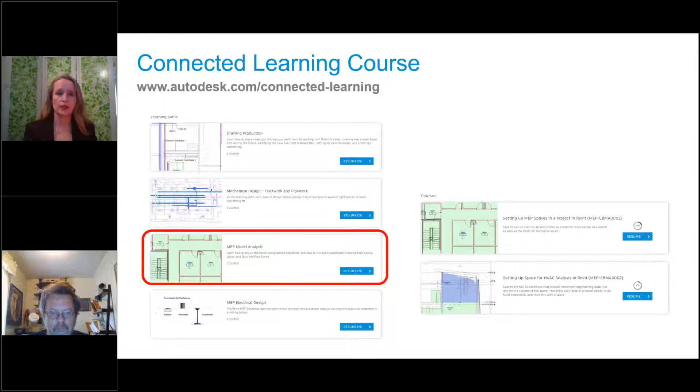Okay, well, I know we ask a lot of people to do some of the learning online beforehand, but if you couldn't, I'm going to go through some of the same things we did in the videos on the Learning Center about adding spaces, how to use a space naming tool. We're also going to look at how you can use a schedule, and then how to look at your spaces in elevation and sections, how to fix different volume issues, how to add space separators, and understanding exactly what room bounding elements are. And lastly, we'll create some plenum levels and add spaces between the floors to complete the analysis.

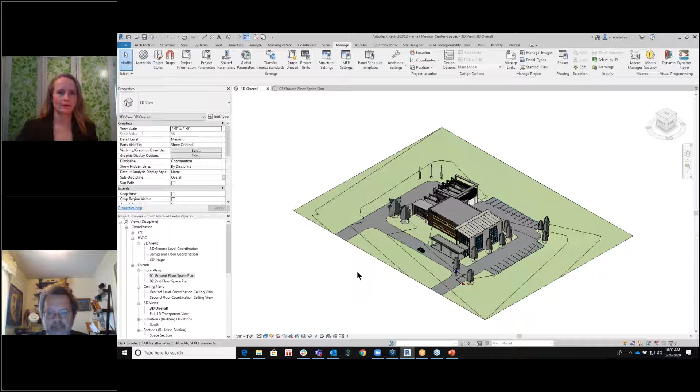All right, so I'm going to go here, and I've started up. This is part of the data sets that we have online, so you'll see some of the same things here. This is a small medical office building that we have. It has a linked architectural and a linked structural model inside of it.

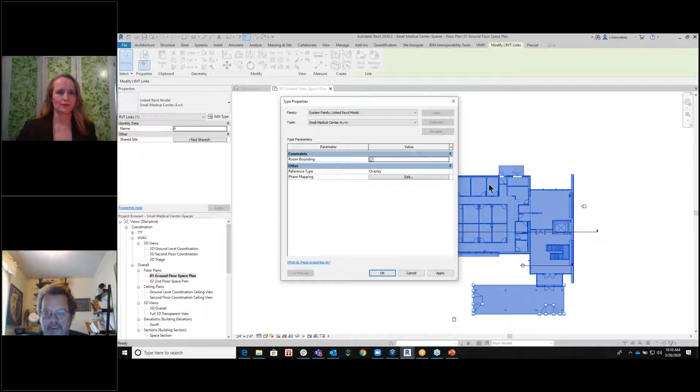So what I'm going to do is go here, and this is just a special view we've set up to show spaces. One of the first things you need to do before you can really get started is find the architectural link model, which I've just selected here. And we need to go to Edit Type. The thing that's really important to make all this work is we need to make it room bounding. What that means is we can use the walls in the architectural model to help define our spaces that we're going to be placing throughout the model to help us with analysis.

So after I've done that, the next thing I need to do is go to Visibility Graphics, which is VV or VG.

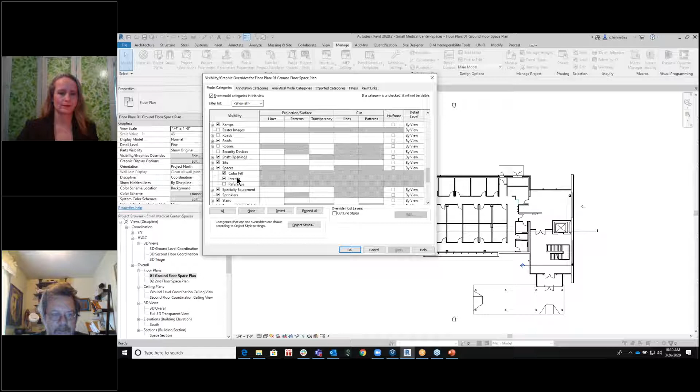What I want to do is scroll down here until I find spaces, expand it out, and make sure the interior part is filled out so that we can actually see them when we place them. I'll click OK, scroll in here a bit, and go up to the Analyze tab.

Now, we have these things called spaces. What they do is help define the area and volume of a room that they're inside of. I'll click on here, go inside a room, and you see it automatically finds the walls and the boundary of the room. I can just left click to place it here.

Now you notice I can select it here, and this shows all the properties. You'll see it has information for lighting, electrical loads, gives us the area and volume, and also talks about mechanical airflow. So a lot of information that the MEP engineers can use inside of these spaces.

I can place them one by one, or I can go up here and do Space, and say place them automatically. So I'll left click here, and now it's telling us it's automatically created 53 spaces. You'll also notice when I click on space here, I can tag all these as I place them.

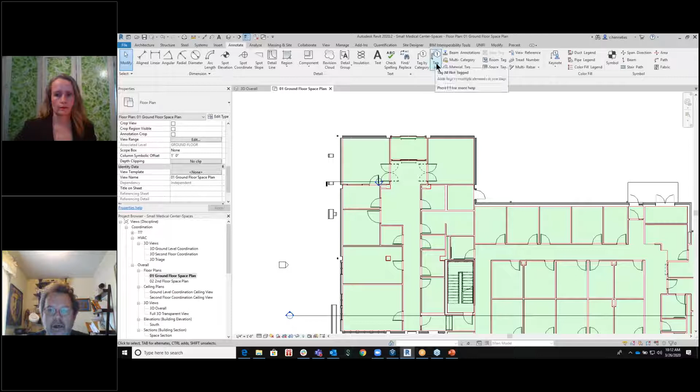If I forget to do that, I can come back here on my Annotate tab, say tag all, pick my space tags, and click them. Now it's gone in and numbered and named all my spaces based on the way they were put in. So now I've got all my spaces here created on the first floor.

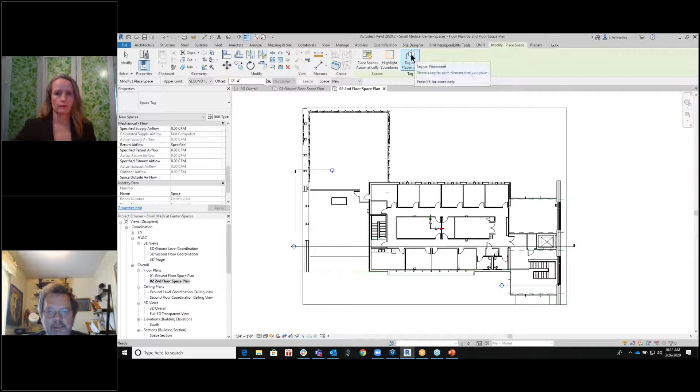I can also go to the second floor and repeat the same operation. I can go to Analyze, Space, and this time I want to say Tag on Placement, and place them all automatically. Now it automatically created 32 spaces.

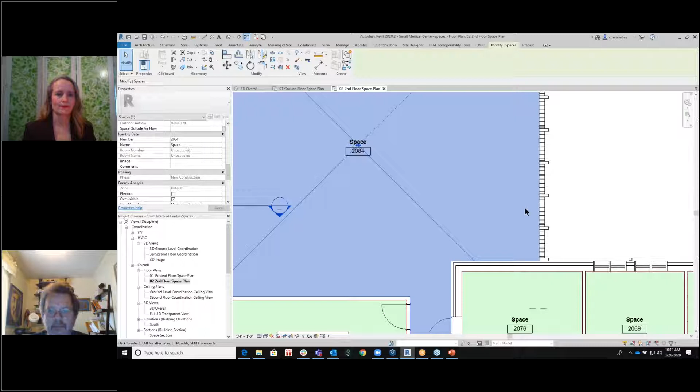Now, as we zoom into these, you'll see this is space 2084. If I click on this and scroll down here, you'll notice it says room number and room name is unoccupied. If we select this one over here, you'll see there's the room number and room name, but it doesn't match up with our space name and number.

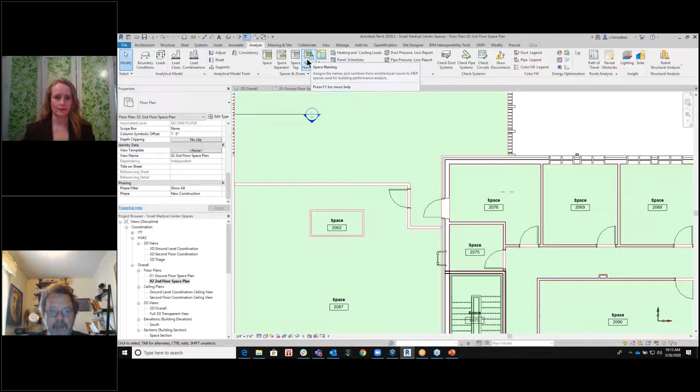So this can get a little confusing if you're trying to do a one-to-one comparison between the architectural spaces and the mechanical spaces. So we can go up here and use, on the Analyze tab, our space naming utility. This gives us the option to match up the names and numbers with the rooms.

We can do names only or numbers only. I'm going to leave it at names and numbers, and do all levels at one time, and just say OK. Now you're going to see some of these have duplicate number values. That's OK for right now.

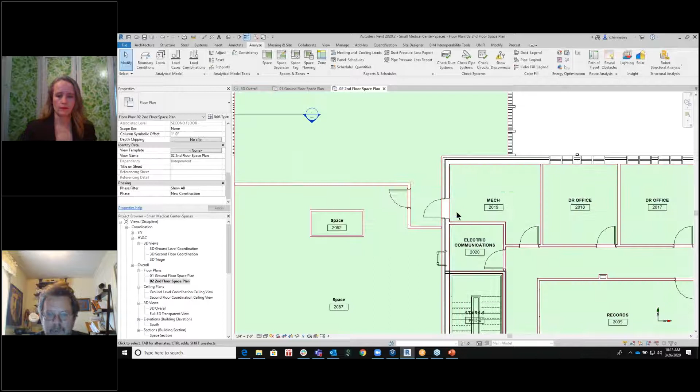I'm going to go through here, and now you'll see it's renumbered these and also renamed all the spaces so they match the architectural names. I'll go back here to the ground floor, and you can see the same thing. So now I've got them all placed, with the names and numbers matching up.

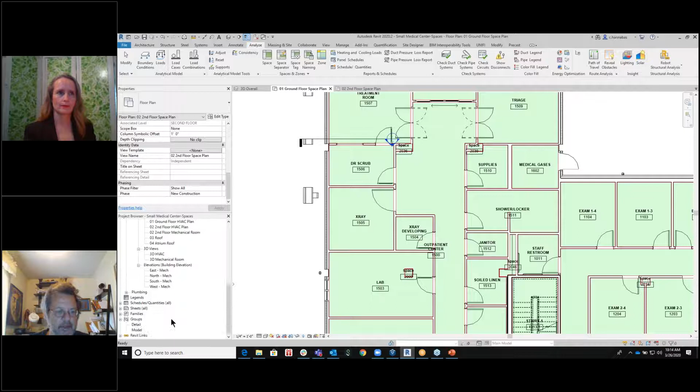I want to come down here now, and let's do a little bit more analysis. I'm going to come down here to my schedules. Let's go down here, and I'm going to open up. I have a space schedule.

Now we can see a listing of all the spaces, names, numbers, room numbers. We see their area, condition type, construction type, and where they're at. Now, this is kind of confusing - it's not very organized well. I'm just going to go here and edit the sorting and grouping.

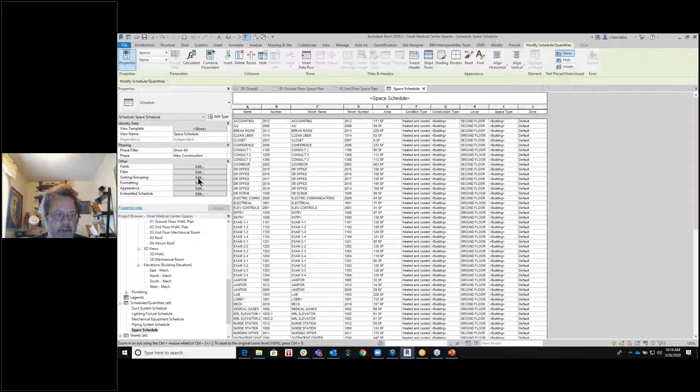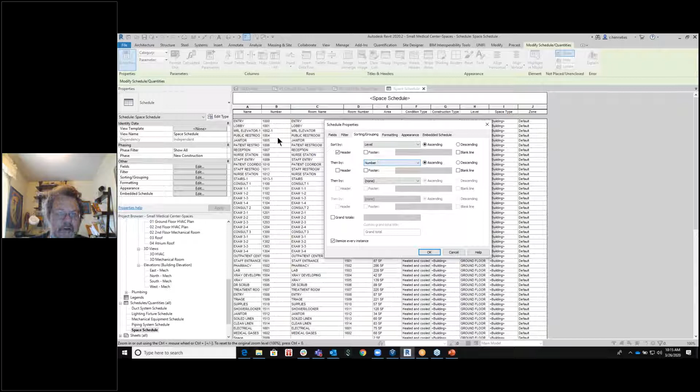So what I'm going to do is first organize them by level, and then perhaps do them by number. So I could go here and do them by number, and say OK. Now, I forgot to do one thing just to make it a little easier - I want to put a header in here so I could see where the separation is. You'll still notice I've got them now all labeled by their number, and I'm going to say OK.

Now I can see they're a little bit more organized, and I can see their actual names.

I can see the room names and room numbers here. Now as I scroll down, I'll notice this space here is very small. Okay, let's go see what happens here.

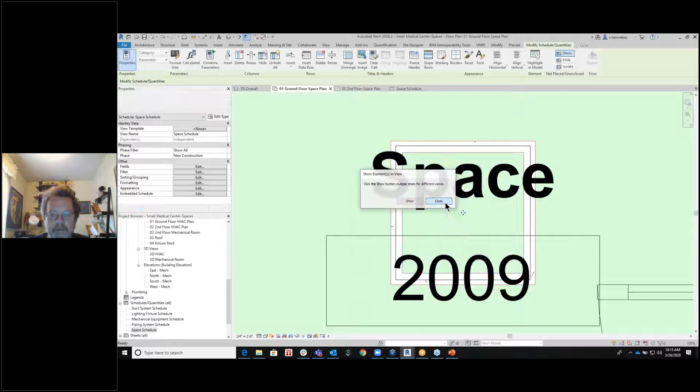If I click on this space and go to highlight in model, it's going to automatically take me to that space. And I'm going to zoom out and I'll see it's just a column, right? So I probably don't want to include that when I'm actually doing any calculations on this.

So let's go back here. Now I can come in and rename that to say I want to just call it column, just like that. And you're going to see it's not going to be heated and cooled, so I can change that to unconditioned, just like that.

So I could do that for each one of these. I'd go here, and now it makes it easier for the next one. I can just type in C, and there's my column. And again, I can change these to unconditioned, just like this.

Now I'm not going to go through and do all those based on the time constraints we have today. I am going to try to show you all the different things, but I'm not going to completely set this building up for us to do calculations. I'm going to show you the steps you would go through in order to do just that.

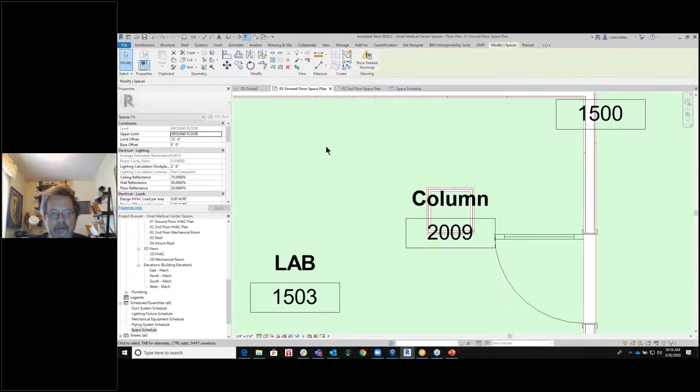The other thing that is somewhat different about spaces - let's go back here before we go on. So now, for instance, maybe I don't want to do a space here in the entry. So I'm going to go here like this, or maybe I don't want to do a space in one of these closets or one of these chases, something like that. So if there's some area I don't want to include, like right here, here's my column again.

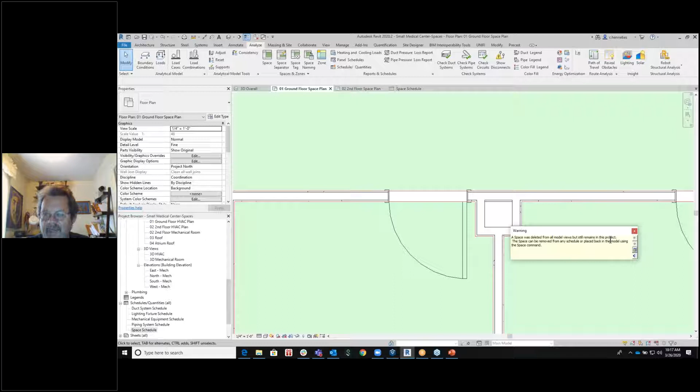And if I go and hit the delete button, it deletes it - you'll see it did delete it from the model view, but it's still in my project. Well, that can get somewhat confusing. So what I'm going to do is come up here and undo it to bring it back in.

Now I'm going to go back to my schedule. What I can do, if I don't want to include these, I can go here, grab these just like this - so there's those right there. And what I'm going to do is delete the rows. Now this will take all those spaces out of my model.

Excuse me. One nice thing about living in Texas is we may have the coronavirus, but we also have tons of allergies. So you may have to bear with me at times.

All right, now we see this is 19 square feet. Well, I'm going to go look and see exactly what that is, and I'm going to highlight it in the model. And there it is right there. I see it's a chase.

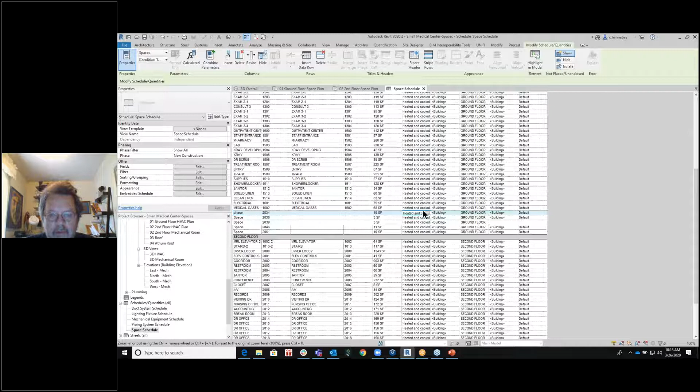Okay, so I'm not going to be heating and cooling that. I'll probably want to annotate or label it a little bit differently so I don't have to worry about getting confused with that later. So instead of calling it something else, I'm just going to call that a chase, just like that, and I'll label it as unconditioned.

All right, so this is what we would go through. We would go through each floor, look at them, and may have to analyze some of these smaller ones that are just chases. We can go through and look at them all and start fine-tuning what our spaces really represent.

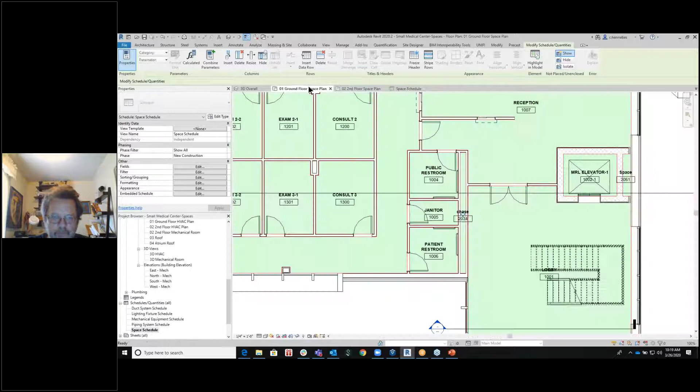All right, so I've kind of walked you through what you would do in order to set up each one of those. Now let's go back here to the ground floor. I want to look at this a little bit differently this time. So I'm going to go here and double click on the section head.

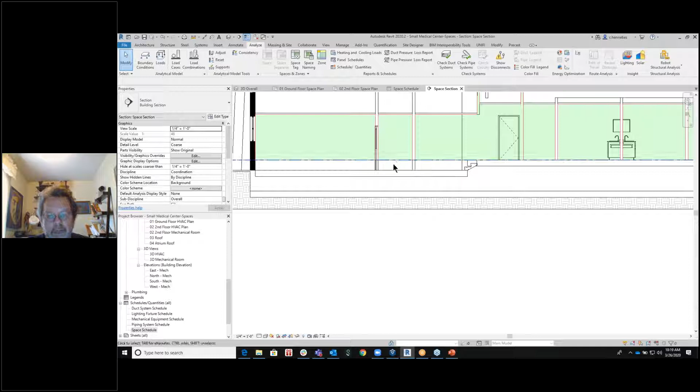All right, now I'm going to look in here and you'll notice these rooms don't go all the way down to the floor - they stop at the level there. Well, in order to include the whole volume and get the correct information, I need to select them and adjust them.

So I can do it several different ways. One, I just select the X here and it gives me a grip and I can drag it down. Watch, I'm going to drag it past there. Oh, it didn't get quite all the way. There we go, I'm going to drag it. And now you'll see I can get it. But that's not really accurate, trying to figure out exactly what that is.

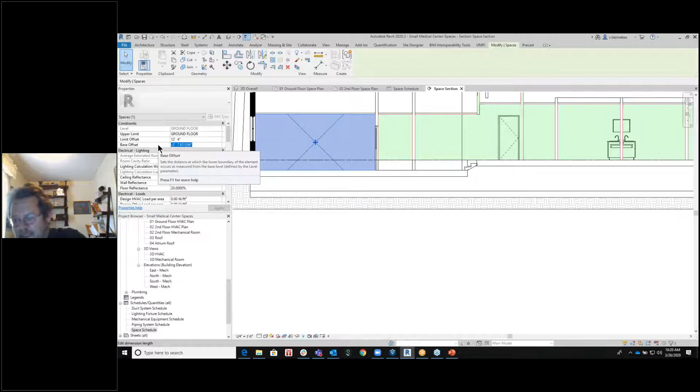But if you'll notice down here, I have a base offset. The upper limit is the ground floor. It's got a limit offset of 12'4", and I could go here and make that say -2 feet, just like that.

And now it's gone all the way down to the floor in its exact measurement. So I could go through and do each one of these one by one, or I'll come back to the ground floor and make a window like this. Then I'm going to go up here and use my filter, say check none, and just select the spaces, like this. Now I can change all their base offsets to -2 feet all at one time without having to select each one individually.

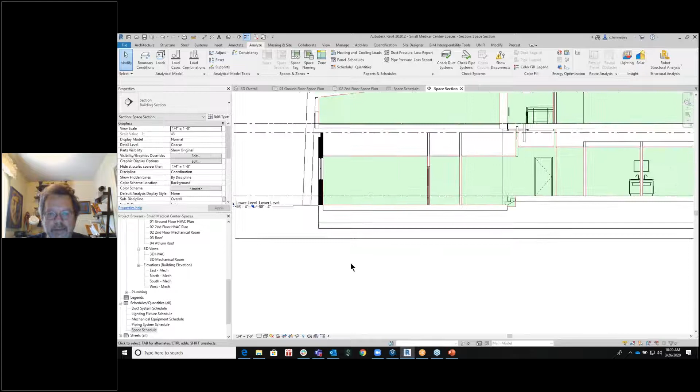Now I'm going to go back down here, and I can see that they're all adjusted. Looking at my section here, I can see how all these are filled up. But wait, this one didn't go all the way to the top. So what I can do there is grab this and pull it past.

And because these ceilings and roofs are room bounding, it automatically fills in correctly. Now I can do the same thing over here. So now I can see I've got them going all the way up to the roof.

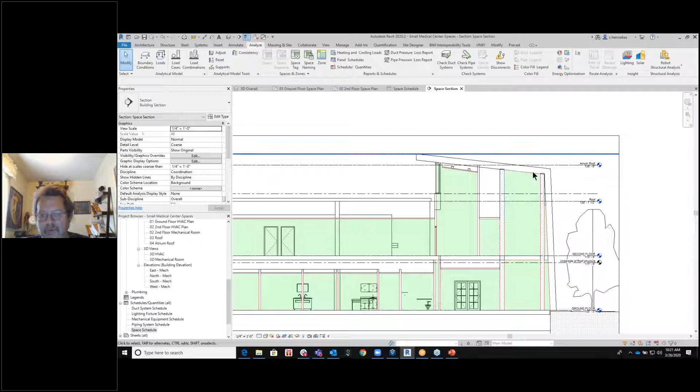Now, this is one thing we struggle with at times - I want this to really go all the way up. Let's see if I can show you a better example. Let me go back to my ground floor here. I'm going to take my section mark and move it back over here like this, and we'll get down here. Now I can come back here.

You'll notice here, because the ceiling is room bounding, just like this. If I go through here, I can tab - oops, didn't get quite far enough. There we go, there we go. And I can come over here and notice that's room bounding.

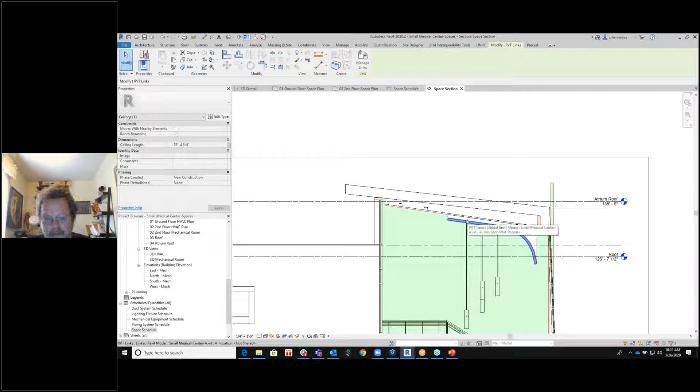Well, I can't change that in my model. The only way I could actually change it is to go and either ask the architect if he would please do that, or I would have to open the architectural model myself and go through and change that so it wasn't room bounding, so it would fill in correctly.

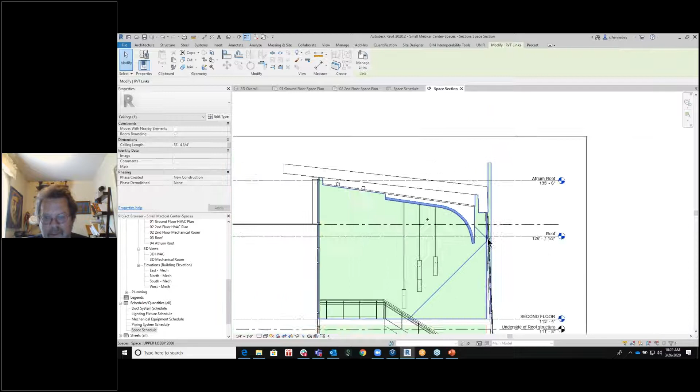And that's also what's causing all the problems over here - I have a small leak through some of these windows because they're sloped. So I've got a problem there that I need to fix some way, and I'm going to show you how to do that. But you can see the rest of these have all filled in.

But now I may want to take this one, and instead of saying here, I could say its upper limit is the second floor, and change its offset like that. And now I've accounted for this whole area here between the two. So that's how we can do adjustments - we have to go through and verify exactly what we have in each one of these as we go through.

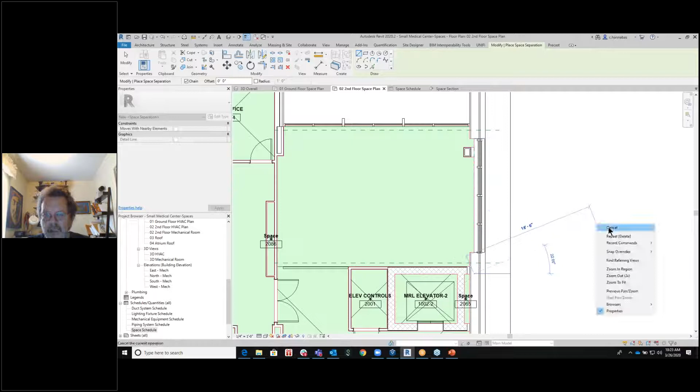Well, let's go up here to our second floor. Another option we have, like I said, what's causing the problems is these slanted windows. You see the space is going all the way out through the windows. So what I can do is come here to the Analyze tab and create a space separator. I'll get it just somewhat - I don't have to worry about getting it exact. But now you can see my space is now stopping at the face of that wall, or those windows.

And I would have to come down here and do the same thing again. Again, I don't have to be totally exact on where I ended at.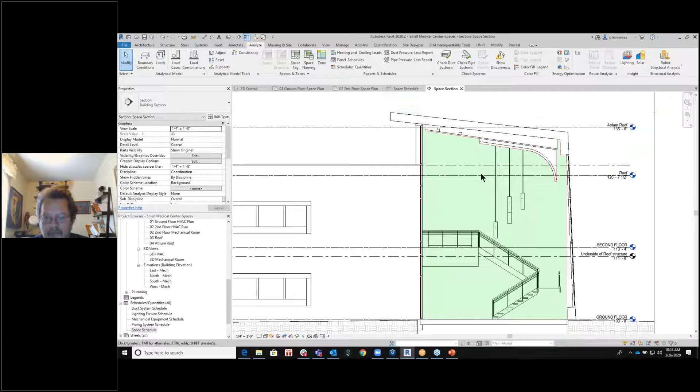I can go through and just set them up just like this. Now, if I come back over here to my section, I can see that my space section is filled in properly, except where I have to make these changes so they're no longer room bounding.

So now I've got in and fixed that space right there. Let's come back here to our ground floor. I would have to go through, move my section around, and look at this. Let's move it right about here. I'll look here and see what this looks like to make sure we've got everything correct.

There's our space there. You can see I also have my space set up here, and this is the plenum area underneath, in between all the floors. So I also need to account for those in order to do correct analysis of everything. One of the things I can do is create a plenum level.

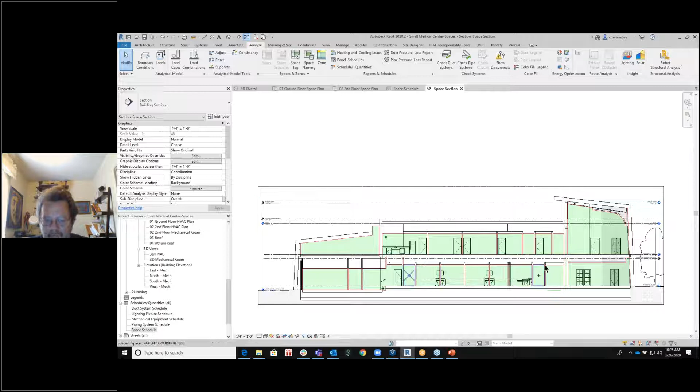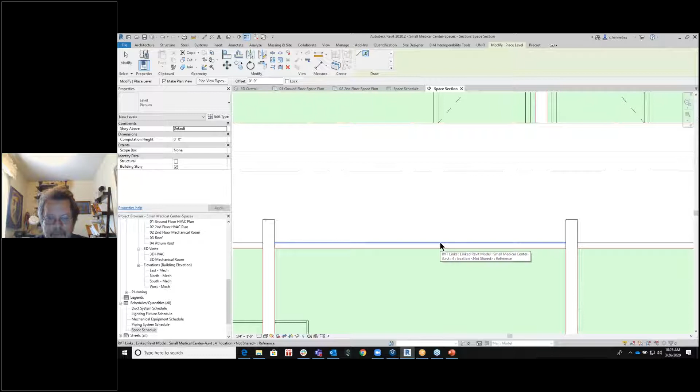So what I'll do here is go up to Architecture, come here to Level, and make sure it's set to plenum level. You'll notice I can draw a line or pick a line. I'm going to change it to pick. I'll zoom in here just like this, get the top of that ceiling, and just click it and change it right there.

Now what I'm going to do is take this and drag it over so I can get out here where I can see a little bit better. And what I'll do is rename this and call it a ground floor plenum or something like that.

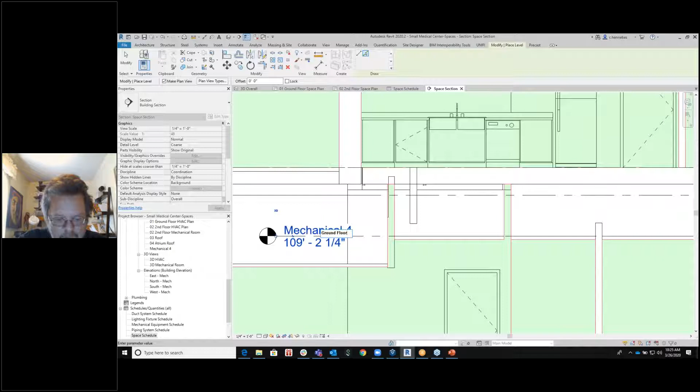All right, and I'll just change it. I'm also going to change and rename the corresponding views. So now I'm going to come over here and you'll see ground floor plenum listed right here in my project browser. I'm going to double click on that.

Now this is not working out quite the way that I want it to. Doesn't quite look the right way. The problem is I need to edit its view range. I don't need it to be 7'6" tall. I need the top to actually be the second floor above, the zero offset. And my cutting plane is too high because the area's not that big. I'm going to change it to like a foot, and then I'll just click OK.

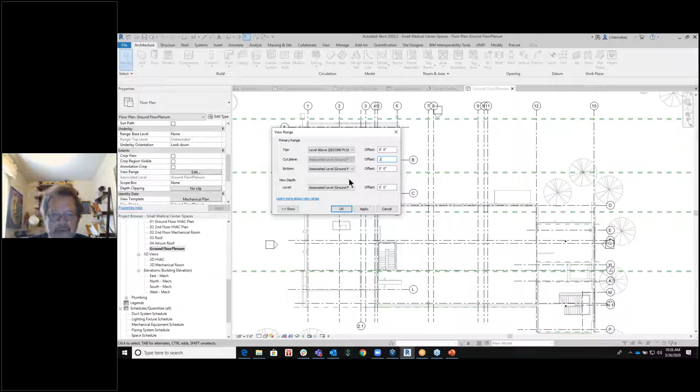Now we can start to get a better feel for how this looks. I could also, if I wanted to make it look a little bit cleaner, you'll notice it's also set to mechanical. So I could come in and change this, or change the discipline. I lost it here, sorry about that. Oh, I have a view template. I'm going to go ahead and change that to none, just so I can get there.

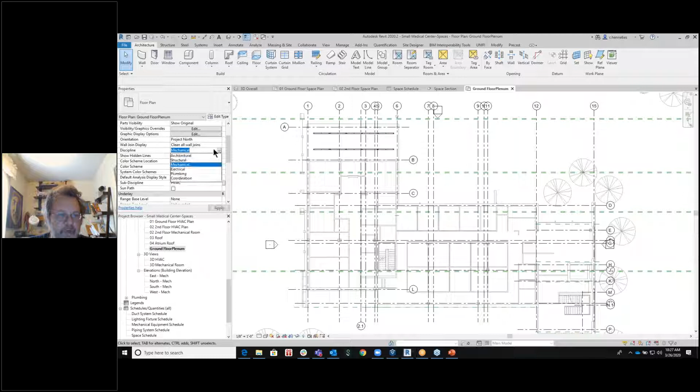Now what I'm going to do is come up here and change this to coordination, just so I get a better, cleaner look at it. I'll go here and change it to coordination. Now my walls are a little bit darker, just a little bit easier to see.

Now I want to go to Visibility Graphics, and I want to make sure that my spaces are in fact turned on, the interiors. I need to go and check and put those on there. Now I can see these are some of the spaces that came all the way up. Those are the ones that we pulled up and adjusted. You can see I have them here. There's my elevator shaft - there it is.

Now, if I want to check and fill in the rest of these, what I can do is go to Analyze, then Space, and say Place Spaces Automatically. Now it's going to tell us that some of them are overlapping - that's all right for right now. Okay, so now I have my spaces in here.

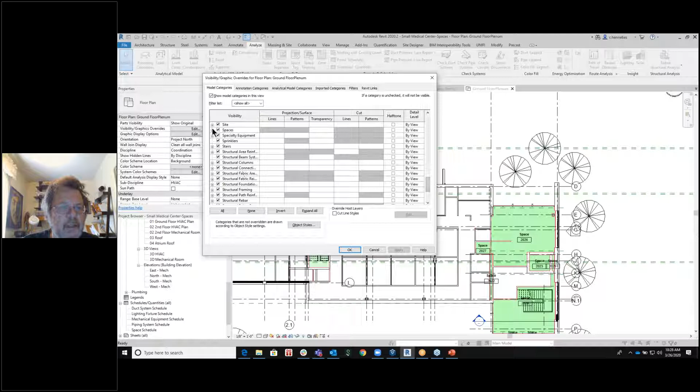Well, what happened here? Let's go see what happened. Interiors, color fills - okay, should be able to see them. Now what I'm going to have to do is I've got some of them that got created here, some of them I'm having trouble seeing, but what happened here? Nothing got placed inside of here. Well, let's go here and we'll click and try to place it manually.

This is telling me it can't find a boundary to place itself inside of. I'm just going to place it in, and you'll see it tells me it's not in a properly enclosed region. Just briefly, the way I'd fix that is to go back and use the space separation line again. I'll do this rough, just to give you an idea—you'd do it a bit cleaner if actually doing it.

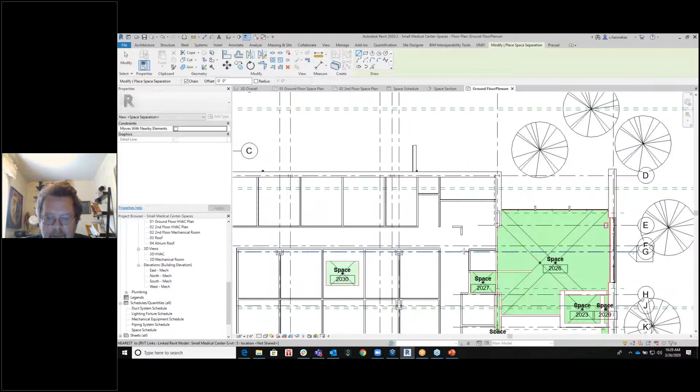I'm going to place a line there. Then I've got to come over here and also place another line, just like this, and I haven't got it filled in all the way yet. So what I have to do is take this and drag it up past that wall. I still don't have it all the way done, so I would drag it just like this.

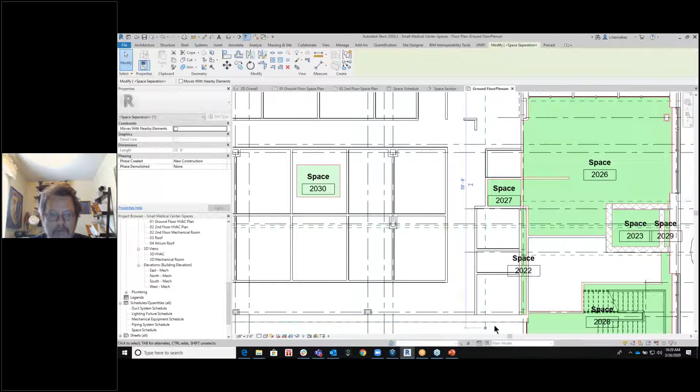Once we do that, I still haven't got something quite figured out here. Let's see—let me do this. I don't know what it is, I just got a little messy there. I'm going to go here like this and draw it all the way down like that.

Well, I didn't carry that one—did I carry it up far enough? That one should have. Let me see if I can move it over to here. It's just not going to let me do it today. This is what's always fun about doing live demonstrations—it doesn't always work.

Let me try something here. I'm not quite sure why it's not filling in all the way, but it's not going to find the boundary today. If I had more time, I could investigate this further.

But this is the approach you'd take when trying to adjust these spaces—you can manually create a boundary. Let me just show you real quick what it should do, and I'll go something like this. There we go. So that's letting me know I've now filled in by creating those space separators.

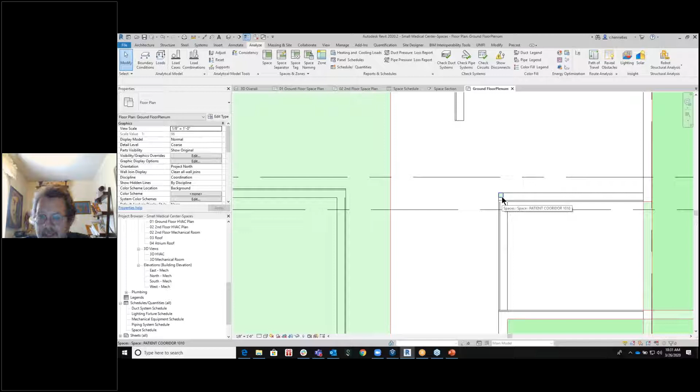If it doesn't always work automatically, you'll have to come back in and find other little problems. So there's a little problem with this wall right here—I can see there's a space stuck in there. Some other little things I'd have to fine tune to make sure all of this worked whenever I went through this.

Now that we have our spaces created, I wanted to carry this a little further than what you saw in the classes. What I wanted to show you—I'm going back to my first floor. So what's the purpose of these spaces? Like I said, they help us do calculations.

We can do lighting calculations. We can't do point-to-point calculations within Revit, but we can get our general lighting, set our lighting calculation work plane, and as we place lights in this, it'll tell us how many foot candles we have inside here. Revit works in reverse—I need to place lights and diffusers, and it'll start filling in the values inside each of these rooms.

Now, where some people get confused is—I'm going to click on this one over here, and I'll see it's heated and cooled, it's occupied, and the space type is building. Well, what does that really mean? I'm going to click here like this. So it's set up by the building, meaning this is all the values it's going to use for calculations.

But I can go in and change this to an office space—I can come in and say it's office enclosed, and that changes the values. All of these are adjustable, so I can make changes to these as I need to. Now I've changed that so it's an office, instead of just inheriting the values for the whole building.

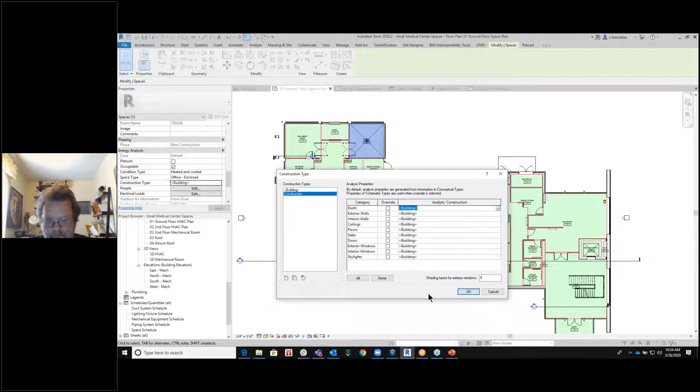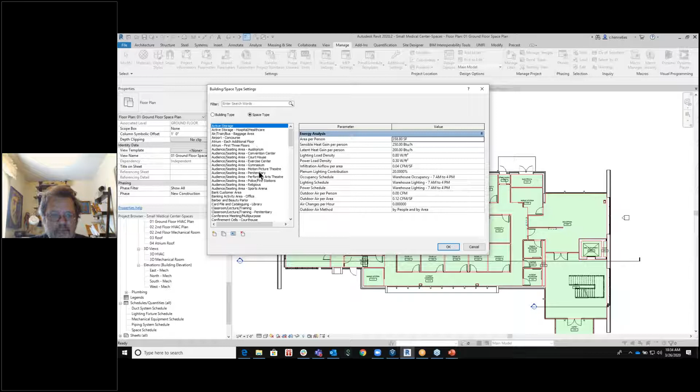That's something you can also do in your template. If I go up here to MEP settings, there's my building space and space types, and there they are. You can create new building types. You can also create new space types, delete some, or make adjustments to them - whatever makes sense for the kind of calculations you want to do.

Once you have all of these values set, you can take this and export it to gbXML. This allows me to take this data out so it can be used by external analysis programs, whether for lighting or HVAC design. There are a couple of programs that allow bi-directional workflow - some do, some do not. There are a couple for each, lighting and HVAC, that are bi-directional. Some of them have direct plugins that come inside Revit also.

So these are things you have to do to clean up your model. You can go and show the information you have here, look at it, and actually examine each space. You can renumber them, rename them in here. I can change whether they're heated and cooling, and also make the same changes for space selection and space type right here, so I don't have to go through and pick everyone individually in the plans.

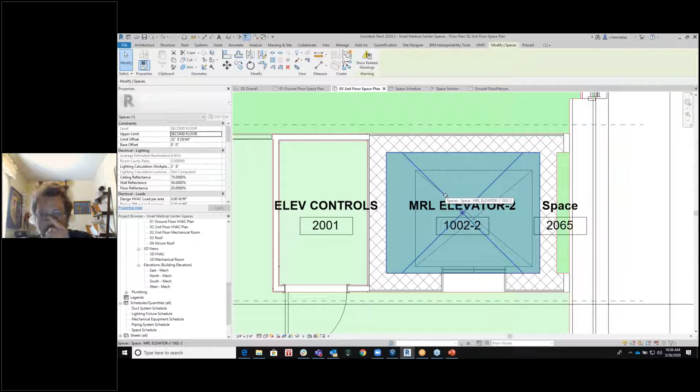So I would want to get rid of this one - I could delete it here. Like I said, that's still telling me there. Then all I'd have to do is come back down to my ground floor now, and I would have to either adjust in section, or go here and instead of saying the upper limit is the ground floor, take it all the way to the roof. So this is another way we can make changes to our spaces.

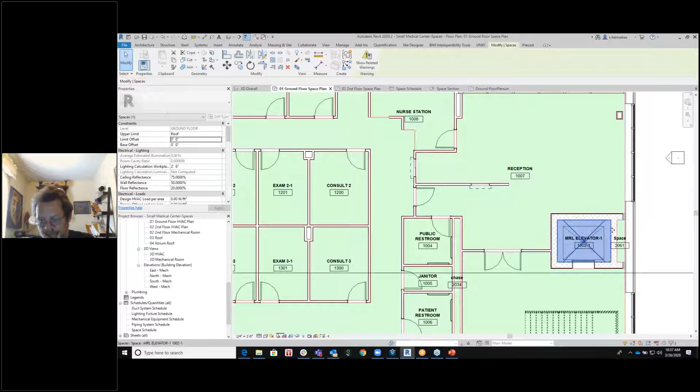We've got something there that's overlapping - looks like I got another one in there. But it's showing you how there's all the different ways we can go through and make adjustments to our spaces to get a more accurate representation of everything.

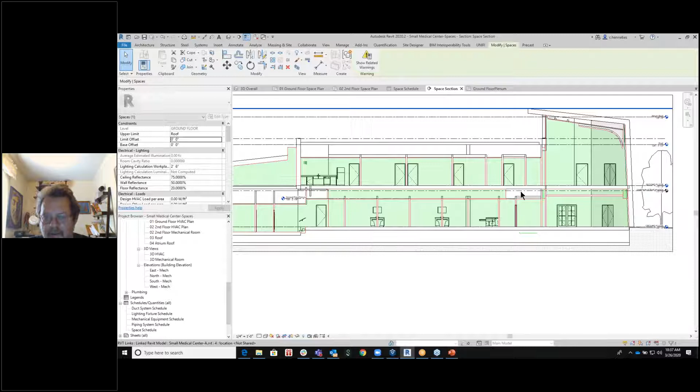So we would use our schedules, come in here and use our section, so we can go through and make sure everything is lining up properly - what spaces we missed. You see we still have some small adjustments to make through here, and then by using our schedule, we can come in and make other changes there.

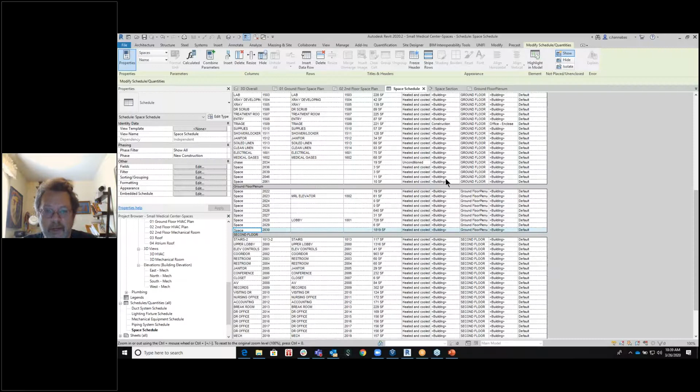So that functionality would be under Analysis, in the space naming under Analyze. You get to pick and choose whether you want names and numbers, names only, or numbers, and you can pick all the levels that you want to do. You can specify individual levels, or do all levels at once. It's an automated tool. We used to have to do lots of workarounds for this, but now they've got it built into the software so it does it for you automatically.

A follow-up question came in: what standards do the default values for the building and space types come from? They all come from ASHRAE.

I can't remember the exact number right now, I'll have to get back to people on that. That's the reason they allow you to go in and make changes through your settings, so you can change the values if you have different local or national standards you're working with, and make adjustments as you go.

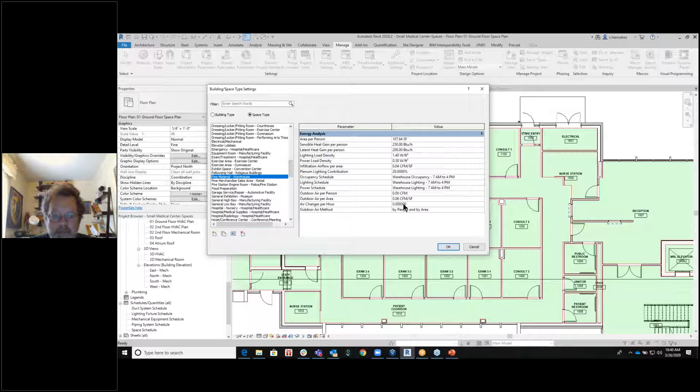Another question's come in: could you show how you got to the room bounding box again? Oh, okay, sure. So what you have to do is zoom out here until I can see my big blue box, and you'll see it says it's the architectural model. That's what that A is.

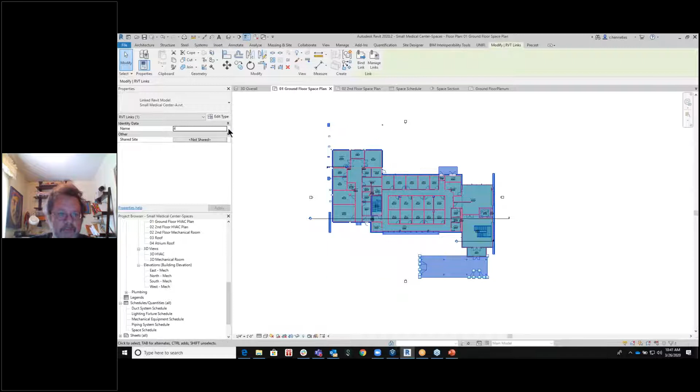I would click on it, go to edit type, and there's where I would make it room bounding, because the MEP model doesn't actually have any walls in it. So we're reaching into the linked architectural model to pull its walls in so we can use them when we're doing, to know where the spaces are.

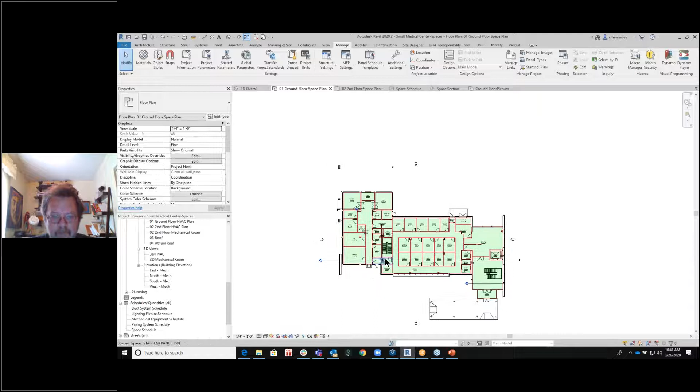Robert's asking: I'd like to know more about why it's necessary to create plenum spaces. Because you're still going to need to use those when you're actually doing your calculations, and it's reporting it as that plenum space for your HVAC calculations. That's the purpose of filling these in, so all the spaces are accounted for.

I would actually go in through here, like this. There we go, and you'll see it's unoccupied. I would come here and change that to a plenum, so that when you export it out, it knows this is a vacated space, and you're accounting for all the volumes inside of the building.

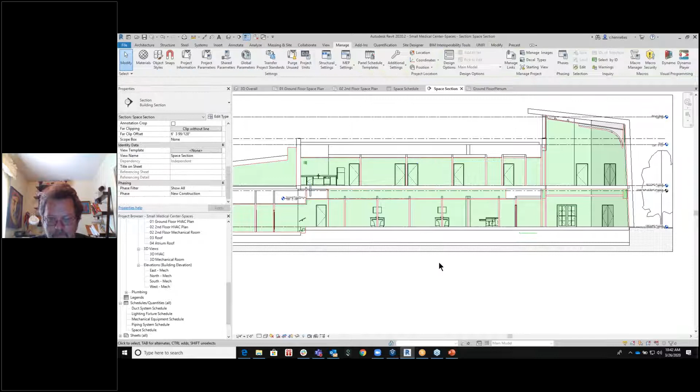Lucas is asking the question: if the architect puts all the information about the spaces in the project, where do I find such information?

You want to know, like, if he puts the walls and things like that in it? Let me actually open up Lucas's line and see. Okay, Lucas, your line is open. Do you mind specifying your question a little bit more for Ed? Are you able to speak with us, Lucas? I'm not sure if you have a microphone or not.

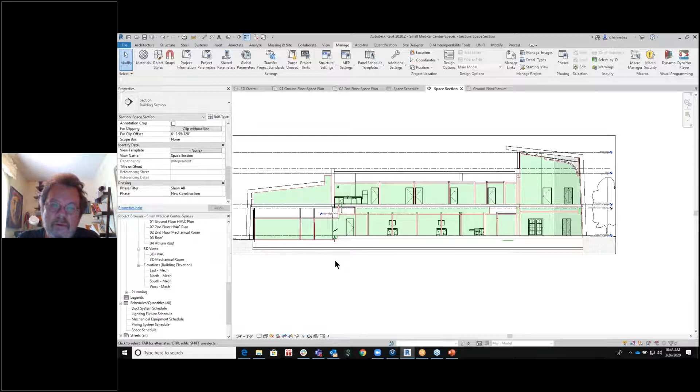Can you hear me? Yes, now we can hear you. Sorry, I'm speaking from Germany. Thank you, Ed, for the webcast. I wanted to know if the architect put information about the walls, about the rooms, about the spaces in the project, and I import that project as a Revit import or IFC import, can I see this information about the rooms, about the walls?

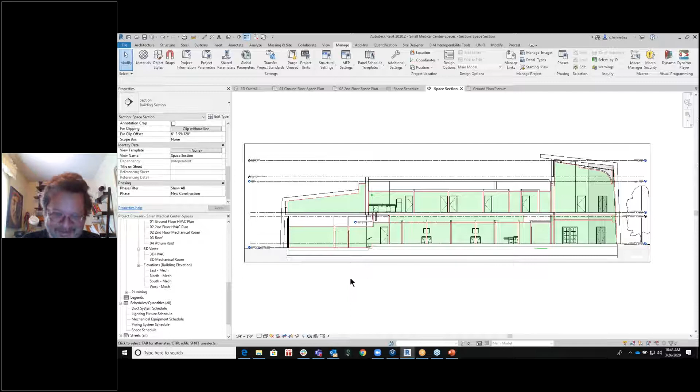You want the easy answer or the hard answer? The hard, please. Okay, the hard answer would be you'd have to come in here just like this, and I would have to go through and tab and select that wall and find out what it is.

Okay, so I'd have to go to each type of wall. I'd have to go through the ceilings, the roofs. Let's see if I can get to there. There we go, because I could see each one of these.

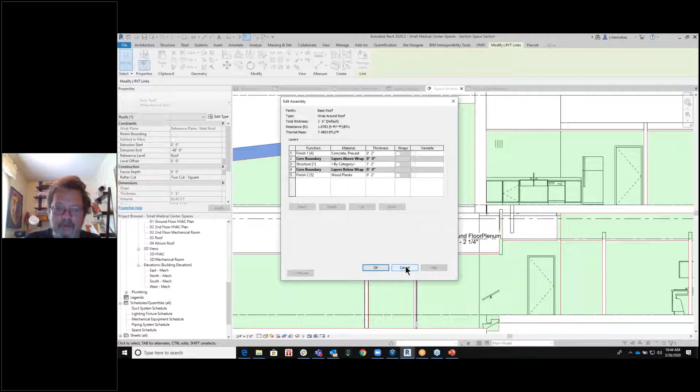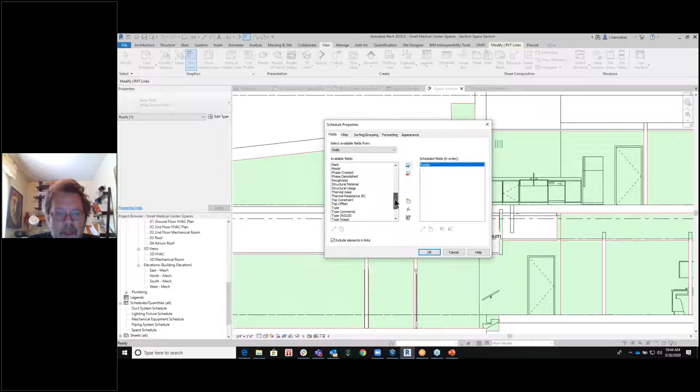If you want to do it a little bit faster even, what you would do is come up here. I just thought of this, and I would create a schedule just like this, say for walls. And I'll go for walls, just like that. And what I'll do is include elements in the links. Then I could come through and get the wall types, what kind of family it is. I can also get the structural material, so I could get it this way by creating a schedule and reaching into the architectural model, and I could start to see all of it like that too.

Does that help? Yeah, thank you. Okay, yeah, that's a much faster way to do it. I just thought of it, I'm sorry, I was thinking on my feet there and just came up with it. Okay, thank you very much. Yes sir, thanks Lucas.

All right, another question came in: how do spaces that are defined by room bounding get their exposure parameters? For instance, are they external or internal exposures?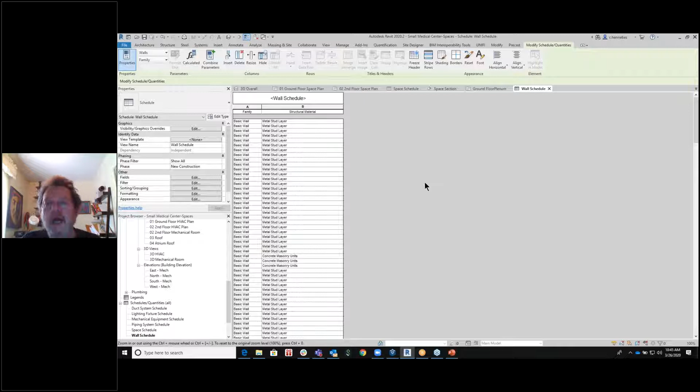Okay, as far as you're talking about how do they know what they are? I believe so. Let me see if I can open up that line. How does it know it's an external wall? Yes. Yeah, how do they know if they're external or internal exposures?

Okay, so when you export this out for analysis, or when you can actually do the analysis inside Revit, the space defines all the openings. So it has all the openings for you, and it's also able to determine whether it's an exterior or interior wall. A lot of it is done whenever you create the space - the way it senses if there's something on the other side over here. It knows if there's nothing there, it knows it's an exterior wall. And like I said, for any external analysis programs, what Revit does for you on almost every one of them is it gives you all the information about the openings and whether it's an interior or exterior wall. It shows the mass of each wall and any openings that are in it. That's just part of the functionality of the spaces.

Great, all right, I'm going to open up his line because - and I am afraid to even attempt your name - it's our friend from West Africa. So I've opened up your line. Do you mind pronouncing your name for me so I don't murder it? I'll give you the easy one. My name is Ayo, I'm calling from Lagos, Nigeria. Right, you got it right first time.

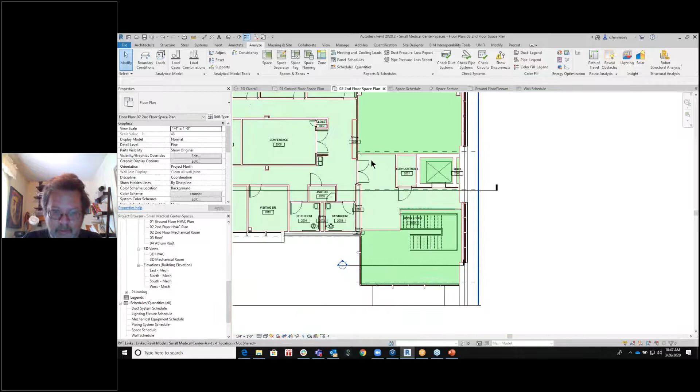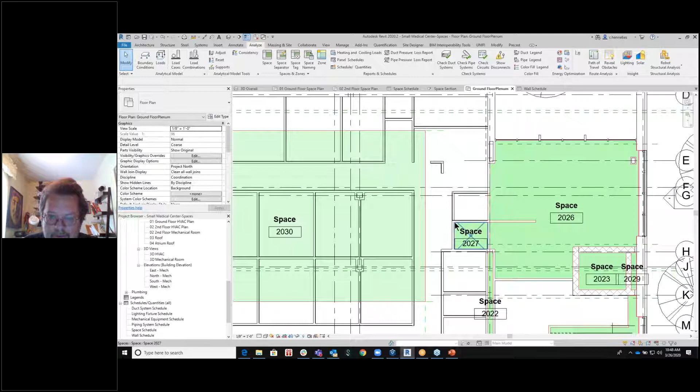Okay, in order to actually - and like I say, I did this real quickly in order to make it work, just so I wouldn't go through all of this - the ground floor plenum level. There we go. Okay, on this, what would typically happen is I would define this and draw it along a group of walls. So what I really need to do is take and draw that space separation line along those walls like this, so I would get it exact. It's very tedious - when I was practicing this, it's very tedious to actually do that. And so then it knows that the walls are there, so it's still able to detect it.

So it's still able to detect the walls even though you're using space separation lines? Right, see that's what I would typically do, is something like that.

Yes, okay. All right, actually the reason why I asked is that if the architect provided you with AutoCAD drawings rather than a Revit model, and you still wanted to model spaces for whatever reason, you might want to use space separation lines to define where the spaces ended. And I was wondering if you ran an analysis like that, would it be able to differentiate between external and internal exposures? I don't think you'd get a very accurate model that way. Okay. Yeah, what I would say is, in other words, you're not getting a three-dimensional model from the architect. Yes, okay.

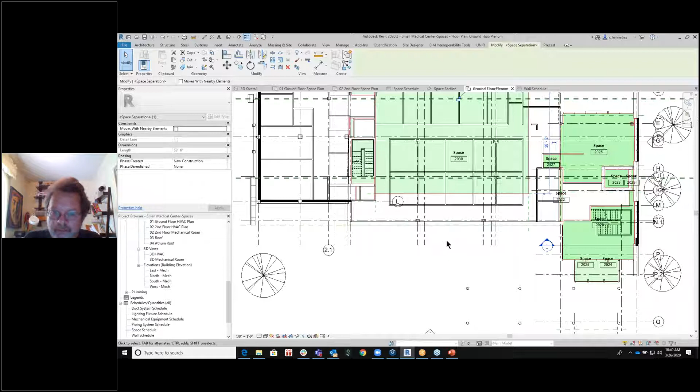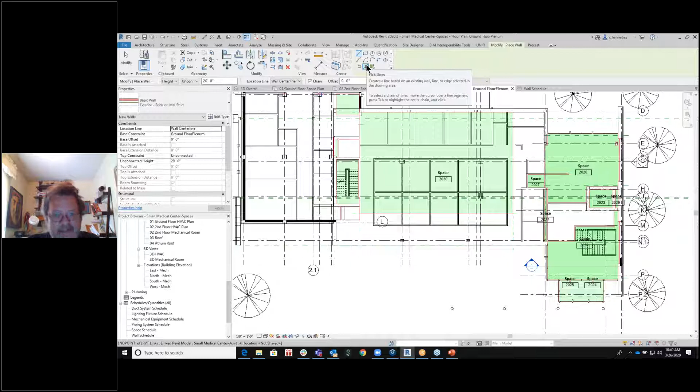You're getting a series of Revit drawings. I remember the last session had to do with using AutoCAD drawings as a basis for MEP modeling in Revit. What most of my clients do in that situation is, for wall architectural, they don't draw any walls - they pick lines through the AutoCAD drawing. Yeah, it makes it a lot more work, but you're going to get a much more accurate model that way.

Excellent, thank you for the question. I appreciate it. All right, we have one more question from Robert: have you had any success getting the building envelope elements to translate through GBXML export import?

The one I'm most familiar with is Trane Trace, the one I've used the most. You get all this information from the model - it creates your rooms. You still have to put in all the other analysis information. Instead of going to your analysis program and creating the room yourself, this gives you that information, and then you make changes inside the analysis software to get everything you need.

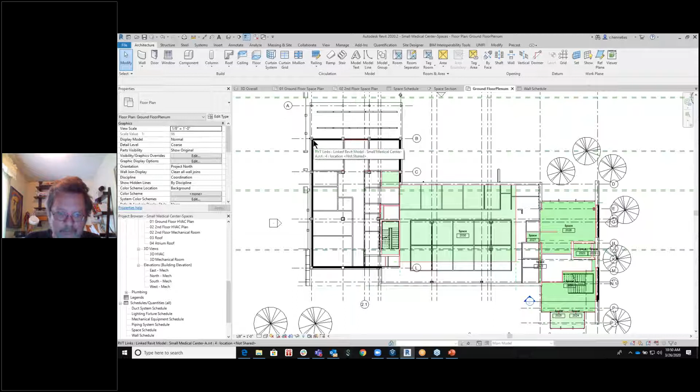With Trane Trace, you can bring that information back into Revit, and it will fill in all this design information for your airflows. You'll notice we have actual and calculated values, so you get it back with this information filled in. But some of the rest of them, I don't think, go bi-directional.

For people who do lighting, there are several programs. The one that has probably the most interaction with Revit - and I'm not trying to advertise - is Elum Tools. It has a direct plug-in that lets you work inside Revit to do your lighting calculations, and it will do point to point.

Okay, great. And one last question: does the space use the walls' properties to determine the insulation properties of the walls?

No, it does not. That's the reason I was trying to show you this - you have to go and pick what the walls are. So it doesn't know what the architect put in there. It's doing it by those definitions that we have specified over here.

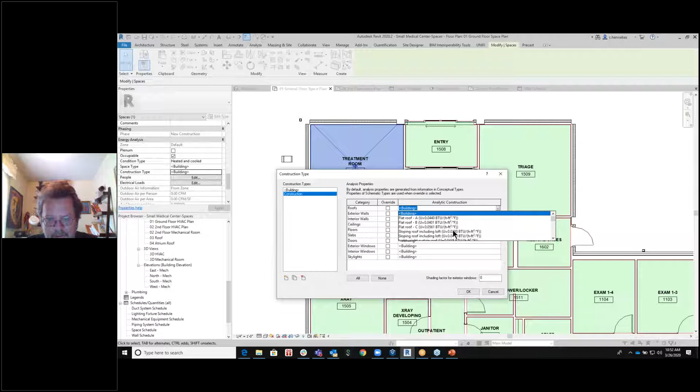The logic behind that is it allows you to do what-if scenarios to get a better solution. So you could recommend, hey, if you change this to another type of roof, you're going to have better HVAC, better circulation within the building. It allows you to go and try different construction methods.

Can you remind everyone the name of that lighting product again? It's called Elum Tools, E-L-U-M. It actually comes in as a direct plug-in inside of Revit.

Let me just make sure I didn't miss any other questions. Oh, I did - have you ever used Dynamo to manage your spaces, like populating the parameters in spaces to modify the spaces until the plenum? I have not personally done that, no.